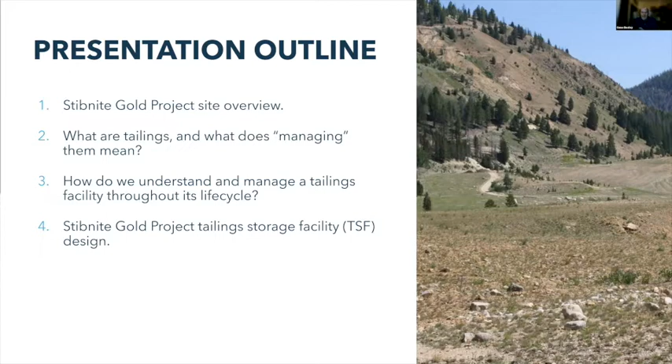So I'll jump right in. Brief outline: I'll give you a quick Stibnite project overview, though I don't plan to dwell on that, since I assume anyone here for this level of detail is at least a little familiar with the project site. First, because I don't assume most folks know what tailings really are, outside of a small piece of the industry. So I'll go through what tailings management is about, what tailings really are, and how we get to where we are now with a pretty advanced design. How do we understand tailings at a site, how do we design and manage that facility throughout its life, and what our design really is - I'll hit that as I go. This presentation has been reorganized a little from what some of you may have seen before, in that I'll hit the Stibnite aspects as I go, rather than saving it all to the end. I think that'll give you a better connection to the information and hopefully flow better.

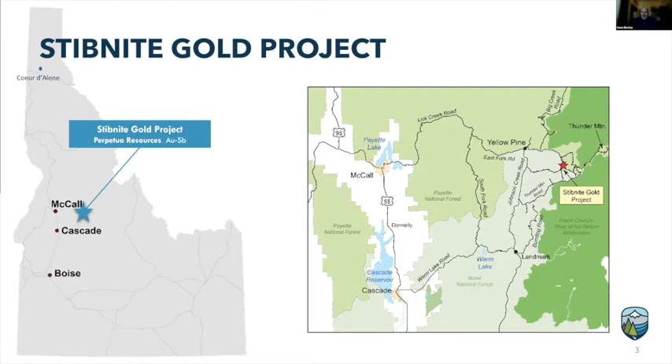So here's where the project is: Central Idaho, Salmon River Mountains, east of Cascade and McCall. It's a bit of a way in there via some really rough forest roads - about 37 miles from pavement, in the mountains. That has consequences for the construction season and design that I'll get into as I go through the tailings design considerations. The other thing about the site is it's been mined for 100 or so years.

That's left a lot of legacies. It's been mined off and on too - mined back in the war years, World War II, Korean War, which is the large piece of the legacy. Then it was mined in the 70s through 90s with heap leach operations, which is another set. The tailings facility we propose will touch on both of those and remedy a couple of those.

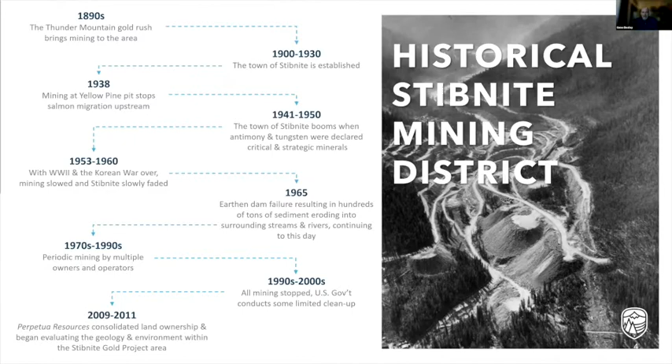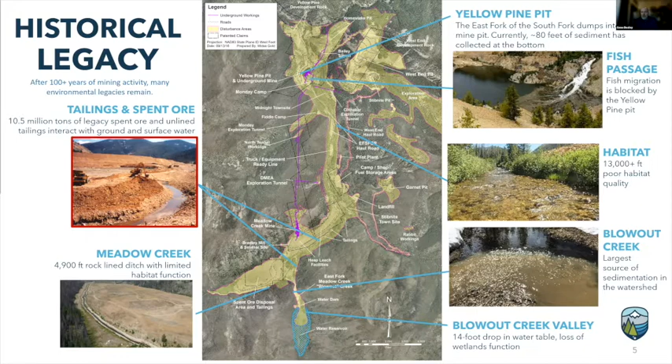I won't go through all these - you've probably seen this before - but the main one is the red outlined one on the upper left. Tailings and spent ore, so tailings from the World War II, Korean War era are placed in Meadow Creek Valley. Those were then overdumped by spent heap leach ore in the 1980s, and that deposit sits there to this day. That deposit is on the site of our tailings facility and buttress, so that's an opportunity to reuse, recycle and reprocess some of that material and store it properly. I'll get into the detail of that farther down the line.

So what this is about, of course, is risk management in tailings. First, what are tailings? That's what's left over after one processes ore. In our case, gold, antimony, and silver are extracted, and what's left over is just ground up rocks mixed in water. That presents a management challenge, because you've got ground up rocks that is essentially mud, and the water may or may not be nice water because it's processing water. That presents some management challenges, and that's what we have to manage throughout the life cycle of the facility.

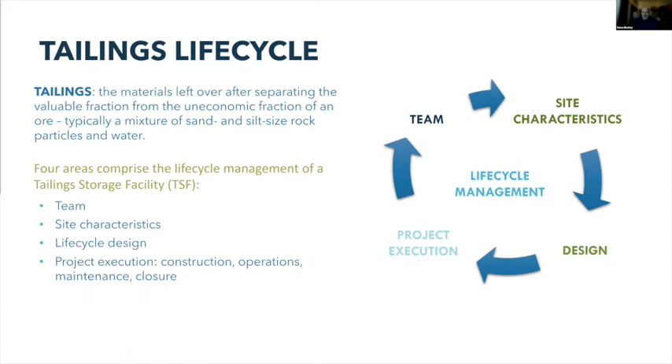What that involves is, first of all, who's doing it? What's the team like, what's the site like - I went over a little of that, we're in the mountains, but there'll be more. Then, what is your design throughout the life cycle, what sort of facility do you build? And then you've got to execute on all those steps from construction onward through closure. We'll hit all of these in turn as we go through the presentation today.

And then when I talk about risk, what do I mean? Well, some folks will say risk means what's the bad thing that could happen. Well, not really.

Risk, when we talk in these terms, is about what could happen and how likely it is to happen. Multiply those together, that's risk. The bad thing is consequences, the likelihood is the likelihood, multiply, and that's risk.

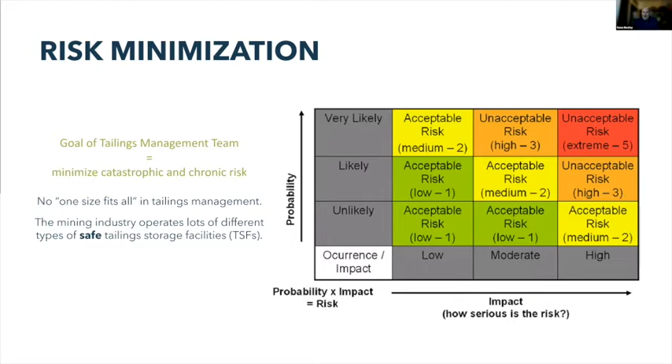One of your first choices is, where will you put your tailings to contain them? Largely tailings start out runny and therefore need a hole to put it in. That can be a pit - that's done, and can work well if the geologic containment is right. It can be a lake - that's done, but nothing we would propose. Or the least desirable option, discharge to a stream - those have been done too. Where we are, and where most of the industry is, is retaining them with an embankment, often lined.

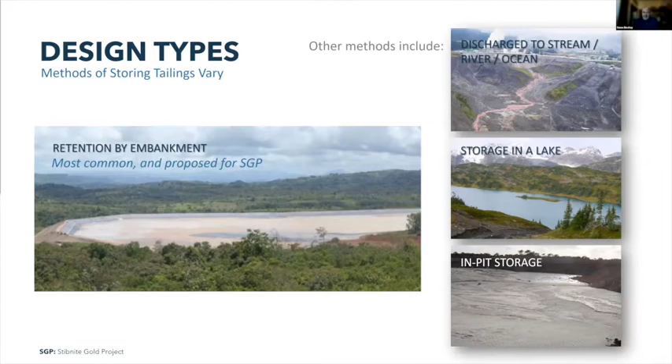And that's what we propose - a widespread practice in the industry with a good record of success. Do we line it? In our case, of course, but that's not always the case. Ours will be fully synthetic lined, just like the one on the left. In fact, very similar as far as what the liner is.

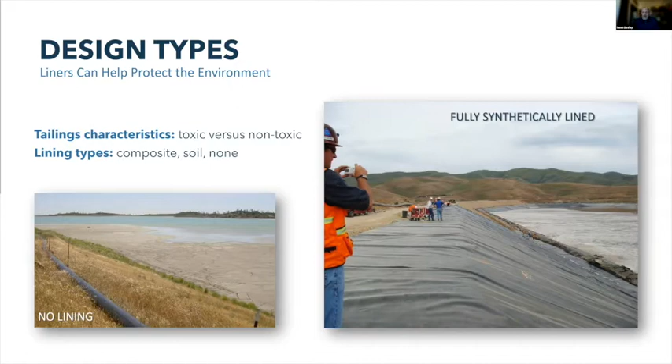The one on the left is actually lined naturally - that site happens to be blessed with very good quality clay in the impoundment and did not require a liner to keep water leakage to a minimum. Some facilities don't require a liner simply because the tailings are relatively benign. That's not always the case with precious metals, but you see that in copper and some other base metals.

Another big consideration, which we'll detail later, is climate and topography. The left-hand side is one extreme - that's flat topography, where almost the whole facility is contained by a dam. That's called a paddock configuration, and that's up in Canada.

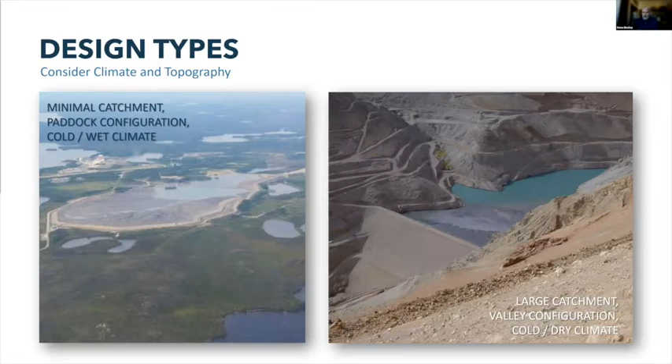The one on the right is in the Andes, a cold, high, and dry part of the Andes, and that's a cross-valley embankment with a considerable catchment reporting to it. On the left, the catchment is the facility itself - there's no valley that you've dammed, you're building what's also termed a ring dike. That's not what we have here. We're closer to the climate on the left and closer to the topography on the right at our site.

Next, move on to team and execution - we won't dwell on those long because it's pretty straightforward. Lots of facilities and companies arrange these differently. Who's your internal team? Do you have an internal team, or do you farm it all out to consultants? Externally, who are they, consultants-wise? And what is your regulatory structure? Regulations differ vastly between Central America and the US, or Africa, or many places mining occurs.

Do you have an independent review team, and how good are they? Not all facilities have them - these days, most do, or are headed that direction. And then, how long has the team been together?

As far as our project goes, we have more of an internal team than many would at our stage. We have a couple of tailings experts on our internal team, plus industry-leading external consultants and third-party reviewers. We're regulated and subject to US regulation with several layers - you've got your NEPA analysis, which is why probably most of you are here, plus state and federal regulatory oversight. Several layers of regulation mean rather conservative design standards. As for team continuity, we've been working on this tailings facility at this site since 2013, some even before that, with the core team together for that long.

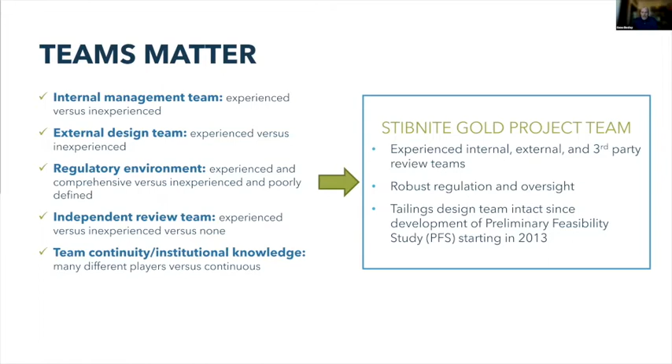As far as construction management, this is another area where you've got to execute the plan. However good your design team was, if the execution's poor, then you've got problems. And there are a lot of ways to execute.

Our case, construction execution, there can be owner built or contractor built. Some dams are entirely built by the owner with the mine fleet, some are entirely built by specialty contractors. Ours will be a blend: our bulk earthworks will be our mine fleet, and then the special stuff like liner and the really detailed work will be contractors.

Management team, of course, we'll be using third-party construction managers, experienced ones, yet to be selected because of where we are in the project. Instrumentation, you want to look at a dam and make sure it's performing as expected. Our end will be on the extensive end, monitoring the water balance, tailings consolidation, the geotechnical stability of the dam and the surrounding landforms.

And then reviews, we've got a third-party review team and we expect their involvement to continue. We also expect our regulators to continue paying attention to the project. It will be regulated as a regulated dam in Idaho, so the Division of Water Resources will be out there for that, and there are other regulations as well that I'll get to in a bit.

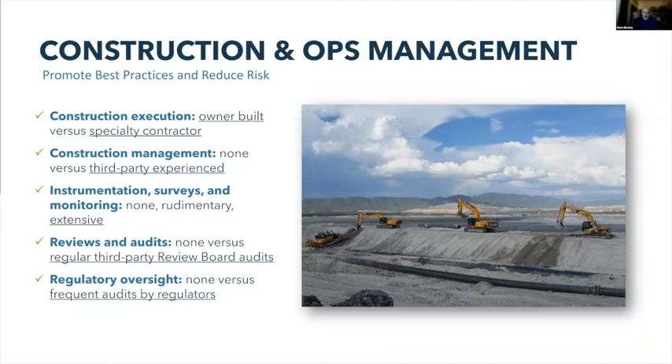And then if we have any questions that popped up, Shelley, I'm happy to start knocking them down now if they're relevant to what I just covered, so I don't have to backtrack. No problem, we don't have any that have popped up yet.

Okay, onward into the deeper dive. We'll go through our site characteristics and what considerations in the design that leads to. First off, here's your general list: what sort of containment will you have, what are your design criteria, what does that embankment look like, rock fill or earth fill, does it have filters and drains, what are your tailings like - there's a wide range, of course - and what's your hazard classification?

And that's driven by the consequences, not the risk I alluded to earlier. Hazard classification is all about what would happen, not how likely it is, and how big is the dam. The combination of those two gives you your design criteria under Idaho rule, as well as really any state rule in the US. And then hydrology - how wet is it, when is it wet, going from wet to dry. You're all familiar with the mountains in Idaho, all those things.

Before I leave this slide, this image on the right is a picture of your typical upstream, downstream, and centerline construction. The important thing to understand with tailings facilities is they're not built all at once for the full life of mine. They're built to start to handle 1, 2, 3, whatever years of production, then raised either continuously or at discrete intervals every year or 2 or 3 to keep up with production - not built to their full, in our case close to 15 years of production. You don't build a 15-year dam on day one; you build a 3-year dam and raise it every 3-ish in our case. How one raises it has a great deal of impact on the stability of that structure, long-term and short-term.

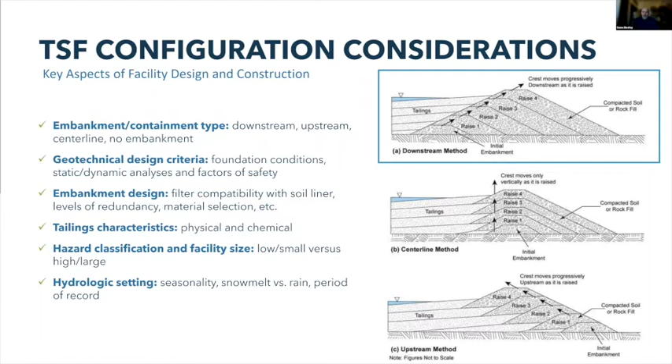There's really 3 key ways to do it: upstream, downstream, and centerline, with centerline just being a blend of the 2. Upstream, you're raising a dam where part of the new raise sits upon tailings as well as on old dam. Downstream, you're raising it so the crest moves downstream, and the new dam either sits on old dam, which is compacted, or sits on the foundation, but never sits on tailings. That's where we will be here for our proposed dam - the downstream method, which all else equal is more stable, particularly in a seismic situation.

And then location - well, where does one put your tailings facility? There aren't that many choices in a given site. You need enough room for the tailings you anticipate producing. So tiny, steep side drainages don't generally lend themselves to good tailings sites, because you might have as much size in the dam as the actual volume of tailings you're storing behind it. So you go through a process where you look at where the pits are - the pits, of course, are fixed because that's your resource.

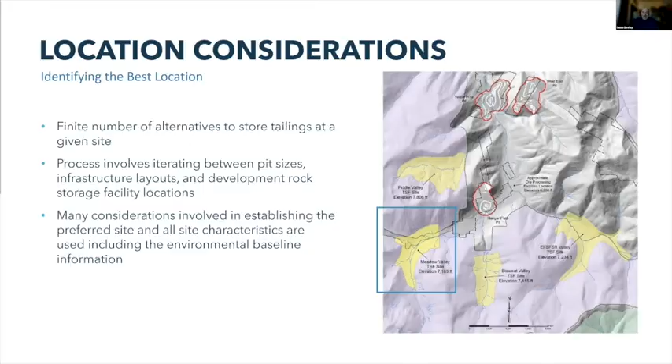That site to the east is on entirely new disturbance if the facility had gone there, and it's in a relatively pristine watershed. The only human impacts up there are pretty much some road building and forest fires, which are human or not, but that's really the impact up in that East Fork watershed where the other TSF would have been. And again, also a very large landslide there.

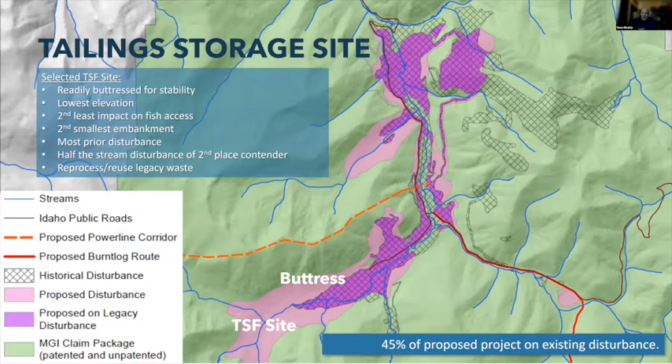So the winning site was really the one we picked in our alternatives analysis. It's got some advantages of restoration as well, because it intersects the spent ore and legacy tailings that lie in that drainage, giving us a chance to pick them up, reuse them, and reprocess them.

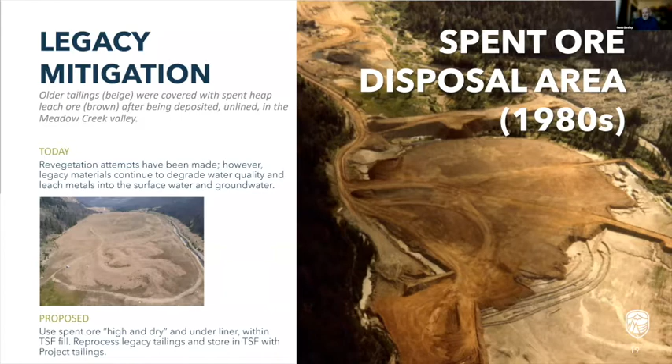Our plan there is, the spent ore will make good construction material as long as you keep it away from water, so it would be placed high and dry underneath the liner of our facility. Then the tailings would be reprocessed, and they would end up mixed with our tailings from the project in our TSF.

Anything so far, Shelley? Sorry about that. Nope, we're good. Keep going. Okay, well, onward.

So some key site characteristics, and all these photos are really our site. I won't dwell on the rest of the site, but specific to tailings and the buttress, what's the foundation? Can you put a dam on it? Will the foundation fail? That's an important thing to know for sure.

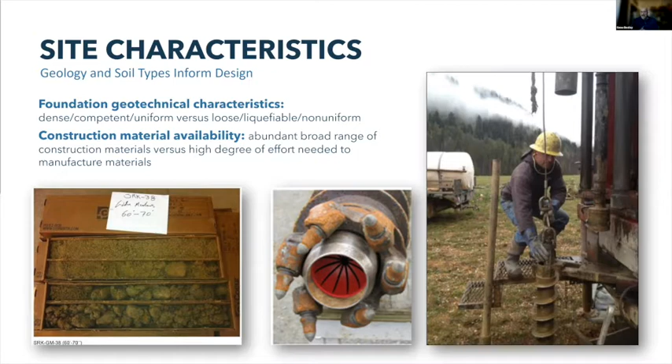And then what can you build the dam out of? It's not just dam fill, right? One needs drain rock, one needs riprap for diversions, and how much of it is there?

Fortunately, I guess, we're relatively blessed on both counts. We've got glacials and glacial fluvial materials in the valley bottoms, and rock really on the sides of the hillsides. Our dams go right up against rock at either abutment, so we have a variety of materials to select from. We don't have a lot of trouble making them. We'll have to screen to get things like drain rock.

And then, of course, we're an open pit operation, so the bulk of the fill will just come from the pits, which is the typical case anywhere you have open pit and need a tailings facility. Bulk of that fill is coming from the pits. In our case, again, we're blessed—it's rock fill, and it tends to be very stable once in place.

And then as far as the foundation, that's what we've been studying for all these years—about 8 years of work. I haven't done anything last year, but about 8 years of work, almost 100 holes related to just the tailings facility and the buttress, over a number of drilling methods, and then a whole lot of lab work and modeling that followed. So we feel we have pretty well understood foundation conditions here for the tailings facility.

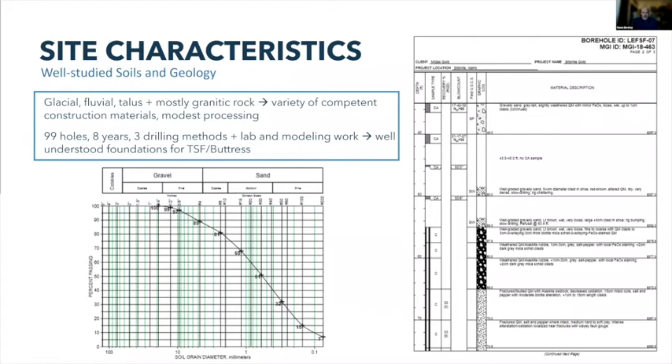And then seismic, which is another one where we've done site-specific work. We did one in 2013, right out of the gate, and I got the final for review today of the updates. We're not expecting a lot of change here, but the site seismicity—we're not just in the high seismic zone, but we're just outside it. It's pretty well understood. I should note, the earthquake we just had gave us a shake out at Stibnite, the Stanley earthquake, but that's a sixth of our design event. So that earthquake was, in the context of dam design, inconsequential—wouldn't have moved a rock.

And then the other thing, of course, we have some topographic challenges here. Again, mercifully, not so much at the TSF site. The landslide avalanche hazard is more of a concern with our present access road, as some of you have probably seen in the news. And that's part of why we want a different access road that's again under analysis right now in NEPA.

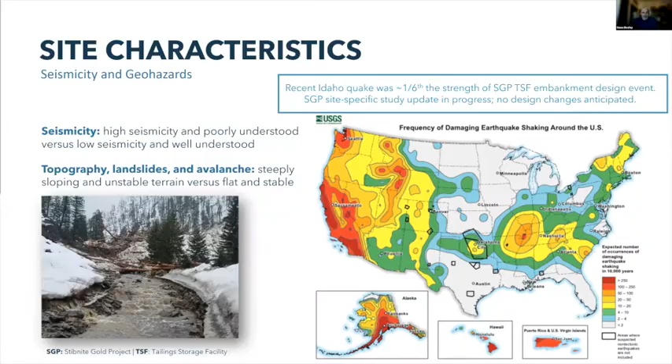And then, of course, climate. These are the big ones for us, right? What's the climate? What's the hydrogeology and hydrology? Where's the water? Any mine site, right? There's always more water than you want when you don't want it, and not enough when you do. And we're not immune to that.

We're generally on site on the wetter side, more than we want in the spring, but pretty well manageable. I mean, we're seasonally wet. It's snowy. But that means reliable snowmelt runoff and a snowmelt-dominated streamflow regime, which is a little easier to at least predict than some others. And we've got 39 years of record at one of the gauges on site, so we have a pretty good handle on the surface water scenario up here.

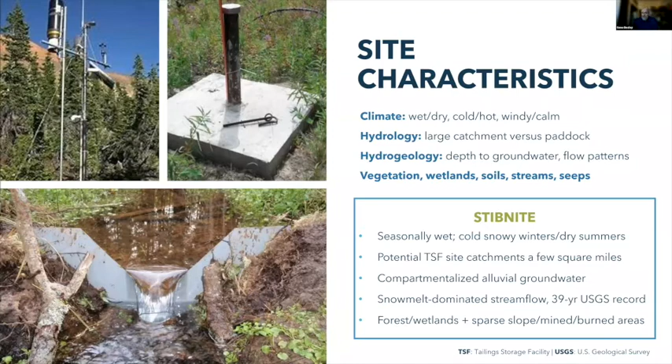The alluvial groundwater is another one, right? We don't have a lot of water at bedrock because we're in the mountains—it's granite mostly. Most of the water's in the alluvium, and that's compartmentalized because sometimes it's 200 feet thick and sometimes it's 2 feet thick. And our TSF catchments, as those go, are small. The one we picked is about 6 square miles, and they ranged from 2 to 10 in drainage area that we needed to divert.

And where that all leads, right? If you've got water, you've got to manage water. We'll manage water all these ways, right? We need a water supply for mill water—that's separate from the tailings question, but that water is what ends up in the tailings. We need to recycle water. No one just pours water into their tailings facility and leaves it there. We want that back. We recycle it, use it in ore processing, and reuse it over and over. We pump a lot of water in circles, with reclaim going back to the mill and tailings slurry going out, and we recover as much of it as we can and reuse it.

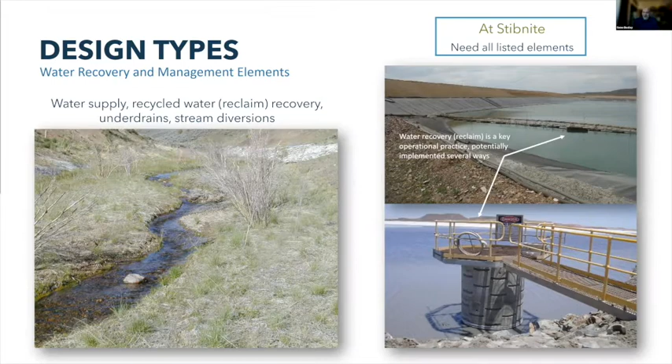And again, we'll need all these things—most sites do. I mean, even a dry site has enough water to need most of these elements. And then how does one size them? Well, a key one is what's your water balance and what's your return period storms—what's your 100-year storm, all that kind of stuff. It's just typical hydrologic analysis like one would do with any dam. The added thing is the tailings component of the water balance, and we'll get to that in a little bit down the line here.

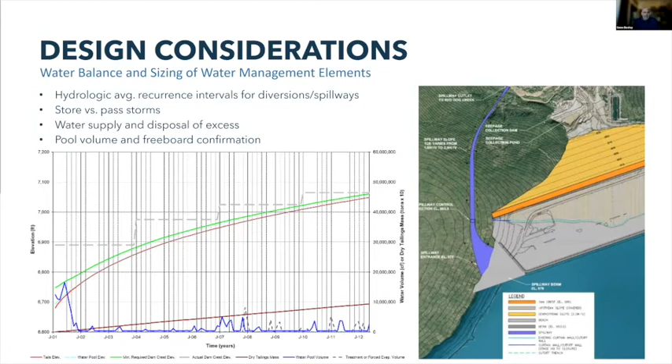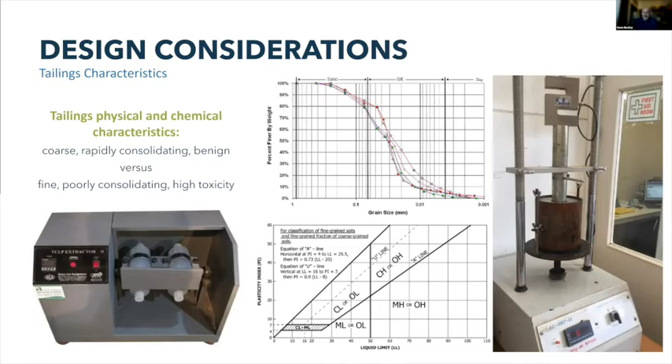And where this all leads, though, physically in a tailings facility—the biggest one that matters here for this design, and for most, is consolidation. And when I say that, what I mean is that the tailings arrive at the facility as a slurry—in our case, half water, half solids by weight, give or take.

And when they land there, some of the water will separate, but a lot of it stays locked up in solids, just in the matrix of the solids. It's mud. And then over time, especially as you pile more solids on top and increase the weight and thus the pore pressure, a lot of that water gets expelled and comes back to the pool. And that's the water we draw on when we want to recycle water and use it in processing.

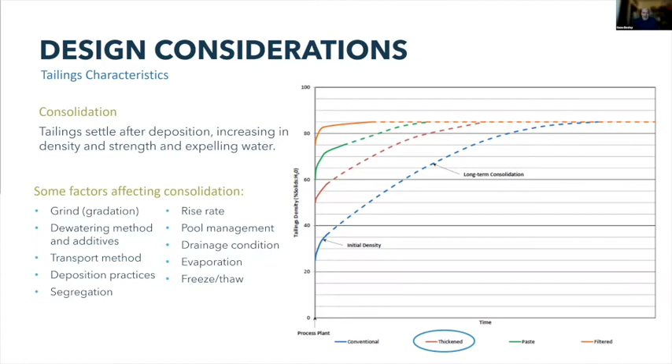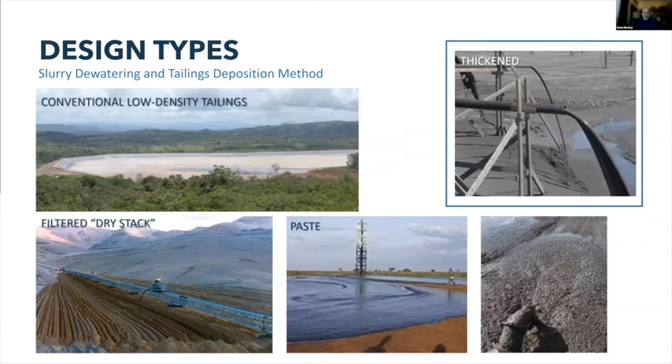The longer path, you're modeling it as taking longer than it probably really will, but that gives us some reassurance that even if it underperforms or even if drains clog, which can happen, we know our dam is going to be big enough and that you won't be scurrying to expand it, which is a position some operators have found themselves in before. And it's also conservative with respect to water management and closure, because if you don't get the water early and your tailings stay low density, that means you're getting it at closure for treatment. And so this is also conservative with respect to sizing our treatment plant at closure.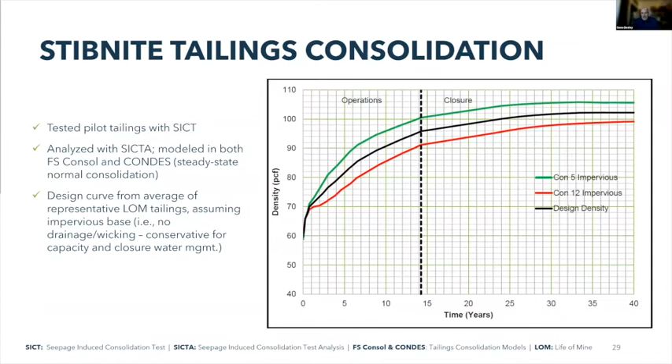And then just all in all, I covered mainly consolidation, but there's other considerations, right? And where our tailings go, right? We have in our ore process, and we start with flotation after everything's ground up and in a slurry. We start with what's called flotation, which is how you get the sulfides out. And the sulfides that we skim off from flotation are what goes through the autoclave, which is called pressure oxidation.

And pressure oxidation tails aren't known for their great settling characteristics, but most of our tailings are actually the flotation tail. The pressure oxidation tail is only 10% of the total. And between the limestone we've added, and the fact that we're actually on the coarse side as gold tailings go at 85 microns of grind, they consolidate pretty well.

And that means we have decent confidence in those consolidation curves, that we get them consolidated quickly, and we can close quickly and get water recovery for operations during operations.

The other thing is, between the limestone addition and the need to use the reclaimed water, we can't allow high cyanide levels in our tailings. Our cyanide needs to be under 50 ppm under the International Cyanide Code, which we will comply with, but we really need to be well south of 10, and will be, because we need that water back. Cyanide in your flotation water inhibits recovery, so we've got very good reasons in gold recovery numbers to keep that cyanide very low in the tailings facility and in the water that returns from it. We'll be far less than 10 ppm generally in the tails.

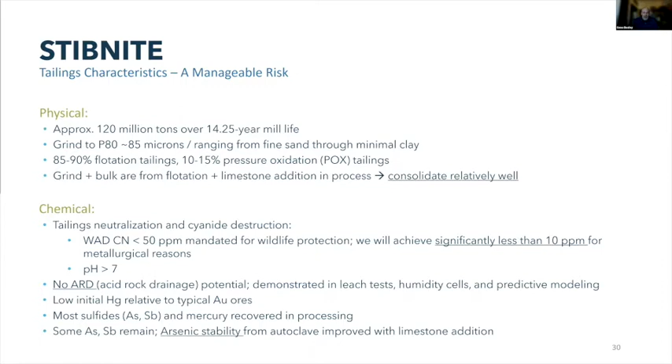And again, our pH is alkaline. There's no ARD in the tails. So from a standpoint of toxicity, pH, cyanide, or arsenic levels, our tailings are good as precious metal tailings go, and they consolidate rather well. It's a manageable risk, and it's one we've accounted for in our design here.

And then, why I skipped it, I'll move this slide down, because this is the water balance slide. This looks like the same information as before, but one can't have a water balance without knowing the consolidation, because the consolidation of tailings, the entrainment of water with tailings, and the recycle back from tailings are very large components of the site water balance.

And these are some typical results you see with that. We look at different curves - how sensitive is it to the performance of the consolidation? What's that mean for scheduling of when your dam gets raised, and what's it mean for water availability?

And what we saw is that we do pretty well here. We have a pretty controllable pool. That middle right you see is actually when we have to do some evaporation on a typical analysis. We'll see the need for some forced evaporation, but pretty minor midlife, to control some of the pool seasonally. But generally, we do pretty well controlling the pool, and we get pretty good tailings consolidation performance.

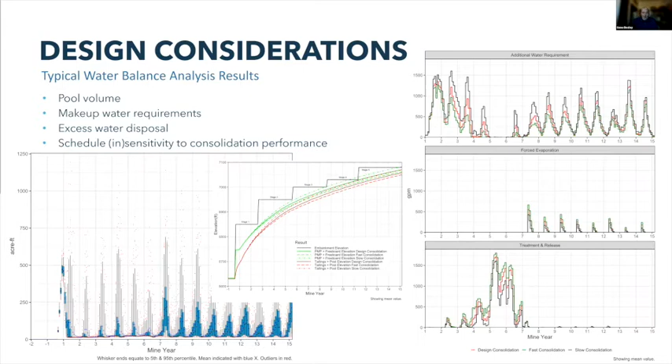And now I'll pause, because then we're going into geotech. So, anything, Shelley? Nope, we're still good. All right.

Okay, well, on to geotech, and this is one where I'll have a hard way and an easy way to explain this. So factor of safety is really just a ratio. It's just math of, what's the design strength of something, or what are the forces that tend to make it stay where you want it, versus what are the forces that tend to make it go somewhere you don't. What's the stress versus the strength, or the stabilizing versus destabilizing forces? And we look at that at a bunch of different scenarios.

Here I'll focus really on the dam face, the downstream dam, and the sort of failure that would lead one to have the failure surface breach the dam, intersect the liner, and lead to a release of tailings and water. There are, of course, books worth of analysis here that'll get into with permitting, but this is the one I think is the one to focus on, because it's the one that would imply, if it happened, a bad failure. So what stabilizes a dam, right, is how strong is it?

What's the shear strength internally of it? Is it made out of clay? Is it made out of rock fill? How strong is the foundation? Is it sitting on rocks, or sitting on clay, or sitting on bedrock? And if there's a buttress in front of it, what's that weigh, and does that buttress help it a lot or a little?

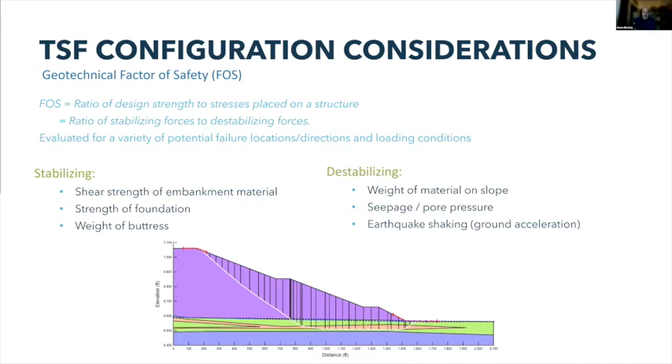We'll leave the earthquake thing alone briefly here for this next example. A simpler way: say I want to make a chair. Well, what makes a chair strong, right? How strong are the legs? How strong is the floor? I mean, you put a chair in your backyard and sit on it, sometimes it punches into the earth, right, if it's wet. If you put it on the kitchen floor, you usually don't break the floor - you break the chair first. So we're going to ignore the floor, but look at the strength of a chair just on its legs.

Well, what else happens? What hurts a chair? How much does it weigh? Chairs don't usually break under their own weight, one hopes, but sometimes they break under the weight of their occupants. And here's your loading conditions, right: one person - if you take a chair and say, I made the chair strong enough to hold 600 pounds, that's my base case. One person, a 200-pound person, on a 600-pound strength chair - the factor of safety is 3.

Okay, Thanksgiving happens, you gain 20 pounds. Factor of safety is still pretty solid, 2.7. Lean back on 2 legs - mom said never to do that. Well, here's why: your factor of safety is 1.36 now.

Or hey, extra family came over before Thanksgiving and you shared your chair with your cousin who weighs the same as you. Factor of safety is 1.5, still all right. Okay, well what if you lean back then? Well, 0.7, below 1. 1 is incipient failure, right? So you both crash to the floor and somebody goes to the ER - that's what happens.

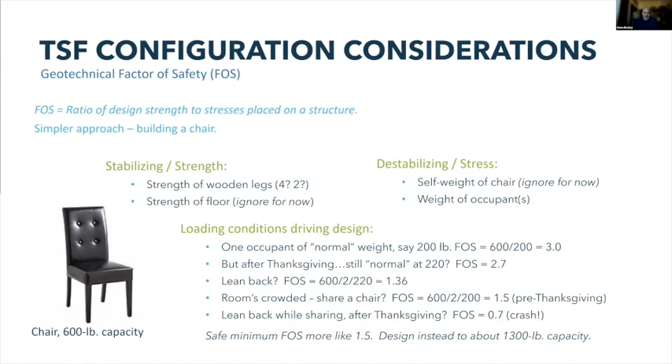Then last one, and we'll jump into Stibnite detail after this, but closure considerations, right? How active of a closure will you have? Is it water treatment forever? Is it water treatment for 5 years? For 10? Is it going to be vegetated? Will it be covered in rocks? Is it going to be covered with geosynthetics? And do you just leave it, or will you be tweaking that design or tweaking that site and monitoring it for decades? And then will that be the same all throughout, right?

In our case, it's early closure that'll look like a lot of attention, because in early closure we've got to treat and get rid of the rest of the water. But late closure will be bare minimum maintenance, because we're planning a self-sustaining system out there. So it's all phased - more active earlier and less active later is generally where you want to be, and that's where we're trying to head.

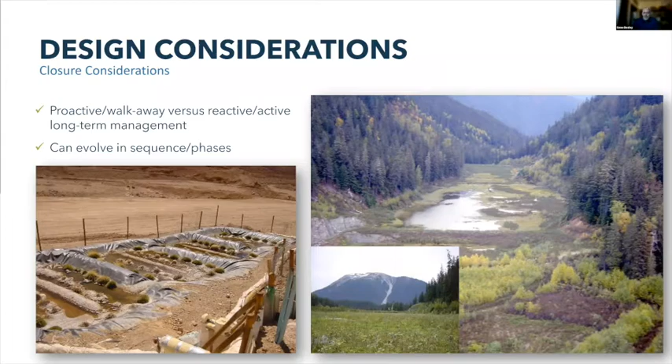And then that's the general ones. And Shelley, last chance, and then I'm going to dive into Stibnite specific stuff. Excellent, I would say go ahead and dive away.

All right, diving on. So design criteria, right? Those are a consequence of hazard classification and a consequence of what your tailings are. In our case, we're a cyanidation facility, of course, because we're precious metals. So Idaho has rules for ore processing by cyanidation, and of course they also have dam safety rules. And so our liner system, our water management, those sorts of things mostly relate to the cyanidation rules.

Of course, the pool management and freeboard has to do with dam safety, and then embankment stability is touched by both rules. And then down the line, of course, we have water quality rules that come into play more at closure, because that's when we'll actually treat for discharge. We'll be operating as a zero discharge facility during operations - we recycle all the available water.

So where that gets us though is, our static factor of safety, I mentioned before, has got to be 1.5. The one for earthquake's got to be 1.0. And that's an analysis I won't dwell on because we're also well above it, as you'll see from just looking at the static numbers.

And our design earthquake - again we're what would be called a large high hazard dam, not because a failure is likely, but because the consequences should a failure happen are high - would be classified as high hazard under the state's classification. So our design earthquake is the maximum credible earthquake, which is basically the worst earthquake that could possibly happen at site, as opposed to some number like a 500 year or something. The MCE is about a 10,000 year - they line up pretty well. So that's where we'd be.

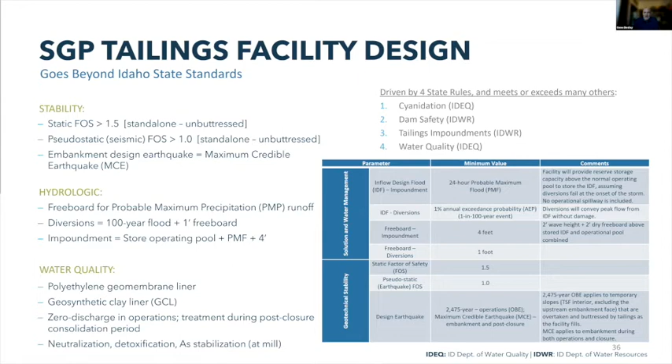So here's where we are. This is the global portfolio right here. This is out of tailings and mine waste a couple of years ago. This is a global portfolio of tailings facilities.

And this is what a factor of safety really means. Factor of safety, again, is just math, it's just the ratio of forces. But doubling the factor of safety doesn't halve the risk. You can increase your factor of safety and your failure probability can reduce by factors of thousands. And you see here, I know the numbers are a little hard, but if you're at a 1.5, you're at 1 in 10,000 annual failure risk or so.

And that's the standard, right? Idaho standard is 1.5 static. Well, if you're at what we were at in the draft EIS design, which has been advanced a little and is actually better now, where we were then with those factors of safety, we're at an annual risk of 1 in 10 million. And that's not us that determined that, that's what came out of the draft EIS from the Forest Service's consultant. So we plot so far to the right, you're basically off the page here on failure risk and factor of safety. And that was, again, before some improvements that I'll get into in a second.

So it's, again, a dramatic change. When you double a factor of safety, you're not cutting risk in half, you're cutting it by orders of magnitude.

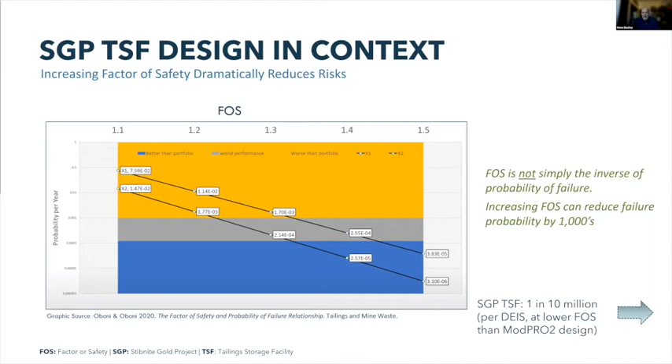And here's why we are where we are, right? This is our starter dam for our latest design. And the starter dam is the dam that's got to last you 3 years. This dam, it's 200 some feet high, but it gets buttressed relatively early after it's constructed. And we've designed it so that it meets the required factor of safety without a buttress. So this thing stands alone at a 2.1. So we're 0.6 above the minimum.

And that's unbuttressed. And the consequence of our updated mine plan is that it gets buttressed before it gets tailings. I'll go through this phasing in a second here. So it gets buttressed before it ever sees tailings. The only thing in there is our water pool that we've accumulated for startup water from the mill, and that's far below the crest. That's going to be 40 feet of water or something like that, consumed very quickly because it's for startup. So that's the initial condition.

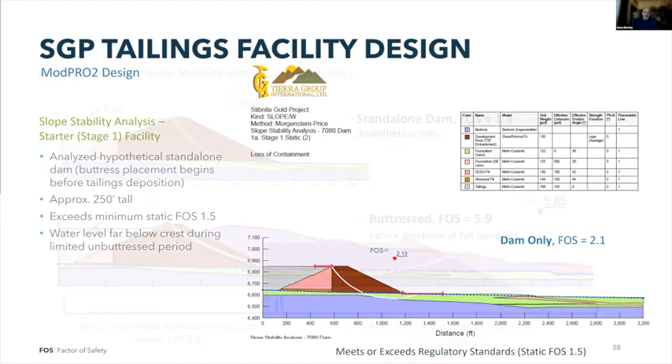The final dam, we analyzed that for standalone as well, right? So that sits there standing alone, full height, never - it's a hypothetical case because, again, the buttress started before there were even tailings installed. So if that were a standalone dam, it'd be 1.8, beats the minimum by 0.3. So it's close to the standard, but over - it exceeds what it has to do.

But when the buttress is there - and this is the buttress, this is the full build-out buttress, but it's pretty substantial before this point - the full build-out buttress, our factor of safety goes up to close to 6 now. And that's again a consequence of reconfiguring the buttress a little, making it bigger and sooner than what we had before. So at all stages, we're buttressed.

We have a standalone dam that exceeds the minimum in its own right, even if it stood alone, but it never really stands alone - there's always some amount of buttress there. And that always gets us at any stage to at least double, so double would be 3. And here we're approaching quadruple the design factor of safety, which again isn't 1/4 of the risk, that's orders and orders of magnitude of less risk. So again, we're already at 1 in 10 million here. Now it's probably better than that.

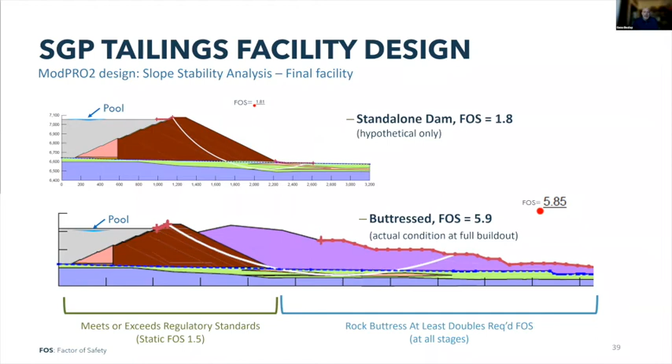And here's the configuration, just a different shot of this, a summary of the design. Again, I've beat you over the head with the idea of the buttress here.

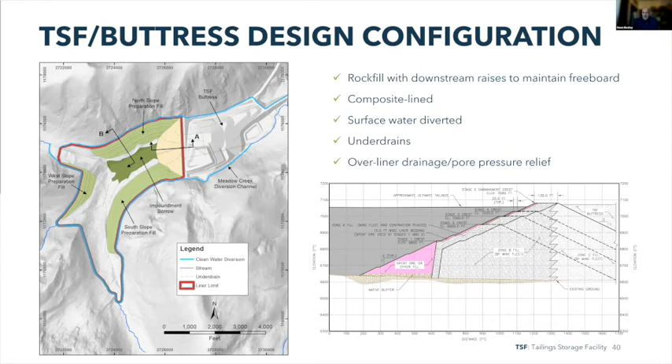It's a rockfill dam with downstream raises. We've got composite liner, surface water diversion, under drains, and pore pressure relief. We really think we've covered all the bases here on keeping the water and geotechnical risks as low as we can.

And here's how it looks over time. We get a lot of questions like, okay, it's buttressed, that's permanent, but what about year two? Entirely reasonable question. The way it works now, the color coding is that if it's a bright color, it's what's installed that year, and if it's gray, it was already put there.

So year minus 1, that's our final construction year. By end of minus 1, we've already got a buttress starting to grow. It's modest, but it's starting. You get into year one, you've got a substantial buttress on the stage two dam, and the stage 2 dam is already there. By year 3, which is when the stage 2 facility goes into operation, tailings are starting to come up to the level past stage 1.

By that point, you've got a very substantial buttress that's only growing more. You've actually got much of the facility already built to ultimate by that point, so it all acts as buttress. What that means is this thing's quite a bit ahead of what is needed.

And that's the consequence of some mine plan changes that move around where we put rock. You'll see this little ladder chart, that's your picture of what your dam must be versus what your dam is, because you build it in discrete years and the tailings grow every day.

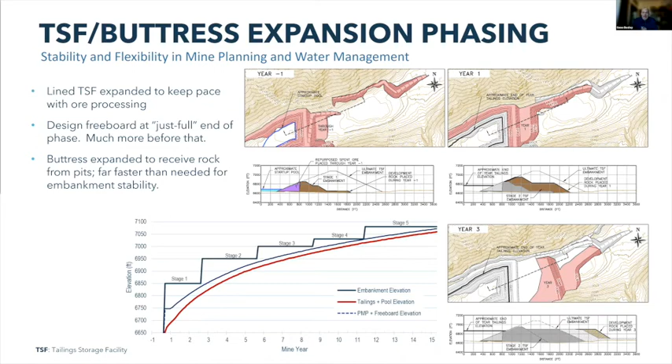What that means is that during any given time, your dam's larger than it would have to be to store your flood. That flood is only met right at the end of the stage, when the next stage is almost ready to be done. So your exposure window's months, and outside that, you could store multiples of that flood.

What that means though, and here it is growing again, is by year 5 we've got our ultimate dam. The only thing left to do after year 5 for subsequent raises related to the dam, as opposed to the buttress which grows more, is to put in some liner bedding and install the liner. So we can stay ahead comfortably of our accumulated tailings and water, and if anything goes wrong, which it shouldn't, we have the flexibility to get a raise done on relatively short notice.

If we find densities aren't what we thought, we have a lot of flexibility to adapt because we don't have to spend time building a dam out of rocks we don't have, since the pits have provided so much rock early. We've got this thing built out—most of the work is done. It's the detailed contractor work that will remain, but all the mine fleet work is really done by year 5. We'll be at ultimate at that time.

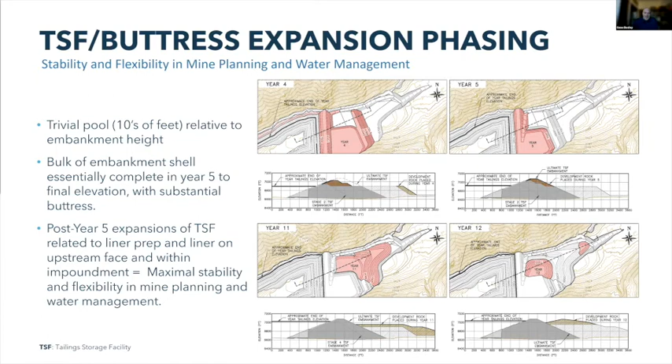As far as where it goes after that, that's the final closure plan. Many of you have probably heard before that Meadow Creek will go back—right now it's routed around at the end of operations. We will treat water to get rid of the consolidation water once the tailings have consolidated, such that they're not making so much more water, and such that we can get out on the surface, drive around, and place things that will stay where we place them and not settle too much.

Once we've reached a pretty high level of consolidation, we put back the river, we put back the wetlands. That put-back is really a lined corridor above the tailings, with several feet of material above a liner, isolating the remaining consolidation water—though a lot of it's gone by that point—from the stream, allowing a stream corridor that can really act like one. The material going back in is not riprap; it's floodplain material with vegetation, forming a stream corridor that can do what streams want to do over the long term.

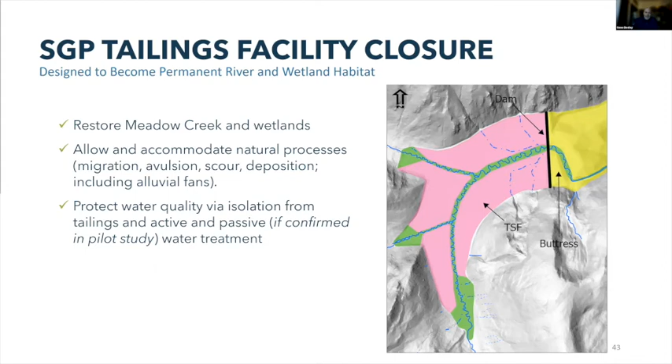We've done all we can to study and analyze those and come up with mitigation measures. We've got a large freeboard, full diversion of surface water, close to 100 holes of geotech, plus a lot of analysis and investigations. And when it all comes down to it, we've got a buttress of 80 million tons of rock that keeps this thing stable.

And then on the water quality side, we have changes to the process. With that buttress and how fast it grows, we've got a lot of slop in the timeline to adapt if anything does happen.

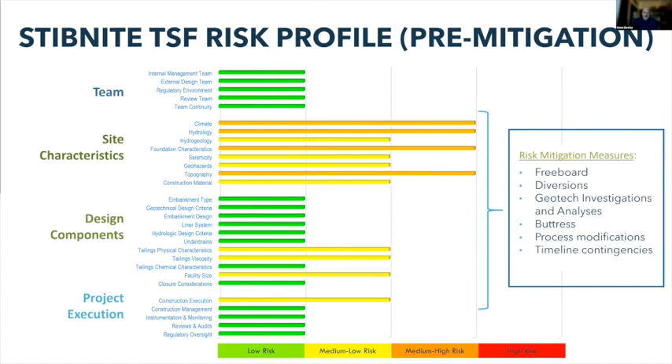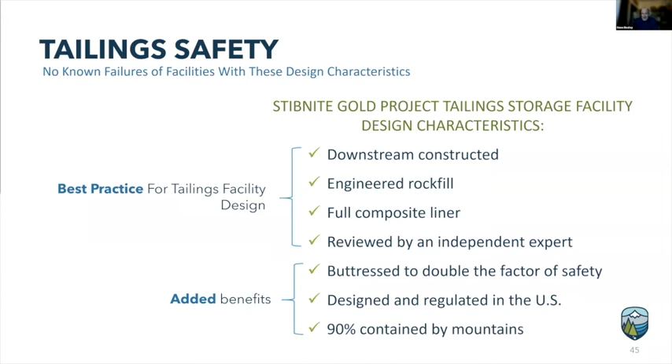That brings us to this: a lot of the orange becomes yellow or green, and a lot of the yellow becomes green on this chart once you take into account what we've done to keep our risks down. No facility with a buttress like this, that is a lined rock fill with downstream raises, has failed to our knowledge. There have been failures of facilities downstream, and of each individual element, sure. But something with all of these together—none that we know of.

So that's it, and this is a summary slide. I've said it three times, so you folks can read it if you want, but I think we can go to questions.

Thank you very much, Gene. We have a few questions. The first one is: what are the regulatory agencies governing the facility design, and what is included in the third-party TSF review?

The regulatory agencies governing the design—the established design criteria—is really the state of Idaho, because through the cyanidation rule and their dam safety rule, there really aren't any criteria that exceed that. Those criteria are basically state of the practice. International Commission on Large Dams matches that, CDA would match that, and our federal standards all pretty much match that. So the controlling criteria is state, but it's in harmony with numerous others.

And then I've already forgotten the second half. So what's the second half question? No problem at all—what's included in the third-party tailings facility review? It's a comprehensive review of the design: design criteria, the geotech analysis, the hydrology.